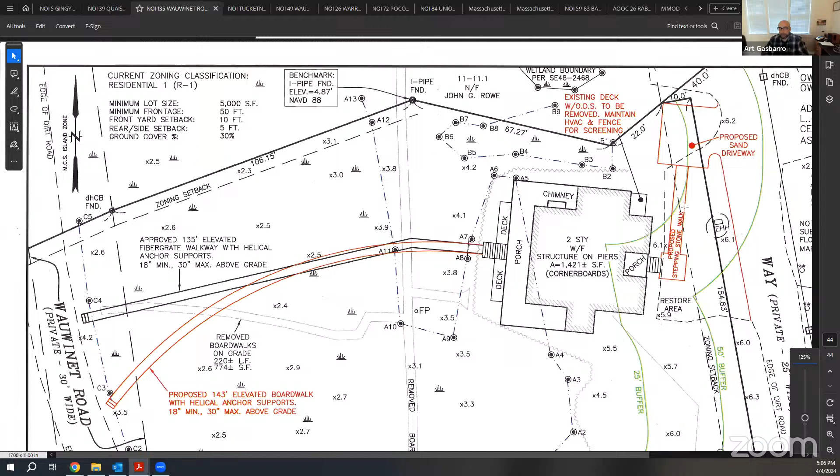And then there also was constructed as part of the last project, the last order, but outside of the approval, on the northeast corner of the house, a deck that had a platform with an outdoor shower and the HVAC units, which need to be elevated due to the location within the flood zone. And we heard the commission that there was concern with the outdoor shower, so that'll be removed. They would like to keep the fencing for screening purposes of the HVAC units.

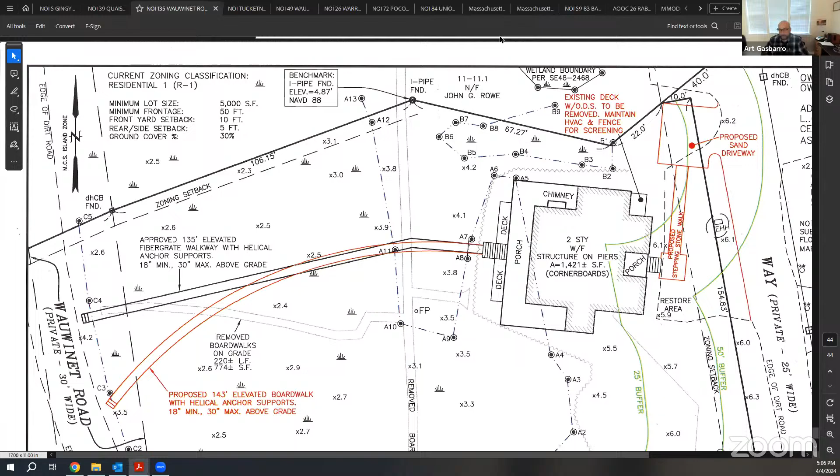And I believe that addresses the changes that we made. We also made a slight reconfiguration of the driveway to narrow up the curb cut to comply with zoning requirements. Again, it's kind of all a sand type area out there for parking, but I wanted to make sure that we showed compliance for zoning as well. And they need to have an on-site parking spot. So we are hoping to be able to finalize this project, clean everything up, and then close both orders of conditions. And with that, I'd be happy to take any questions or outstanding concerns.

Thank you, Art. And before I ask commissioners if they have any questions, I'd just like to register that Linda Williams joined the meeting at approximately 6 minutes past 5. And also, yes, apologies for the delay there in my screen share. I was just trying to get Linda renamed. No worries. All right. Seth.

Thank you, Mr. Chair. My question is related to the driveway area and the proposed stepping stone walk. So previously the driveway in its original location was outside the 50-foot buffer. Now we're looking at a driveway that's inside the 25-foot buffer, which is of some concern. I understand there might not be any alternative on this site, but I feel like the proposed stepping stone walk is not integral to the project and probably should be removed just in favor of it being a grass path. So thank you.

Well, thank you, Seth. Art, do you want to comment or wait until other commissioners? Sure, why don't I hear from everybody? Sure. Mark? Thank you. Yes. To refresh my memory, there was not going to be any side rails on the boardwalk, is that correct? That is correct. Thank you. Any other questions?

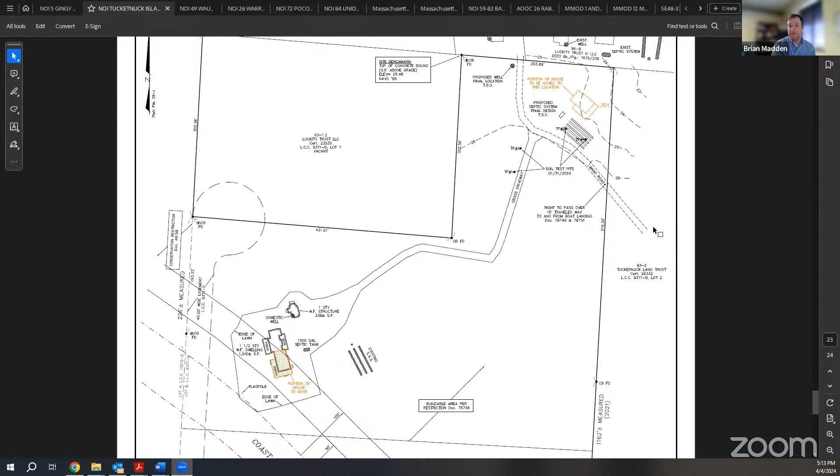And we did get the natural heritage letter, which we were waiting on last time around. So I'll turn over to questions. Thank you, Brian. Any questions?

And seeing none. Any input from members of the public?

So, Brian, would you like to close? Yes, please. And Will? We have everything we need to close.

Great. A motion to close, please. Thank you, Mark. Seconded by Mike. So by roll call vote: Tim Brain, aye. Seth Engelborg, aye. Mike Mazzarelli, aye. Joe Pandowski, aye. Linda Williams, aye. Ian Golding, aye. And since I see Mark Rits is now with us, unless anybody objects, Mark Rits votes aye.

Mark, I apologize. It's that dark shirt, Mark. You just fade into the background. Well, that and the list I wrote out that is incomplete. No slight intended. None taken.

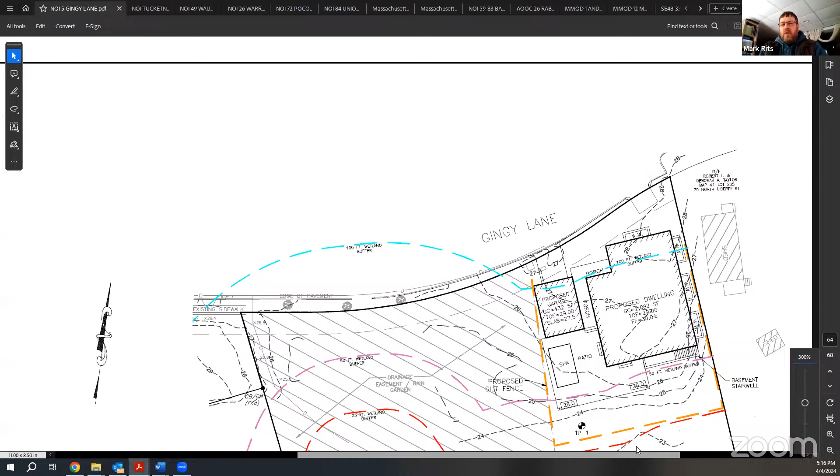We've been putting this one off for a little while. At the last meeting, there was some input from the public and there were questions from commissioners. One of the issues that came up was a question about the age of the wetland delineation. Instead of discussing the old delineation, we asked Brian Madden of LEC to go out to the site and do a new delineation for us back, I believe it was in February.

He went out to the site and reflagged the wetland. The wetland line you see on this plan is based on his most recent delineation. And what we see is there's an area where the wetland has in fact moved up, on the western side of the property. That is where the spillway is from the rain garden on the western part of the lot, the drainage easement there. So basically, the wetland has crept up towards the spillway where additional water is flowing out to the wetland. On the eastern side of the property, the wetland boundary is essentially the same as it was in the original submittal.

So we've shown newly calculated buffer zones. All of the development that we had proposed previously is still outside of the 50-foot buffer zone. In addition to doing the wetland delineation, we also conducted a test pit just south of the proposed spa.

And we found the groundwater elevation at that spot was approximately at elevation 20, or just under 20, just lower than 19 and change to 20. The spa that we're proposing is going to be 4 feet deep, so the bottom of that spa will be greater than 2 feet from seasonal high groundwater.

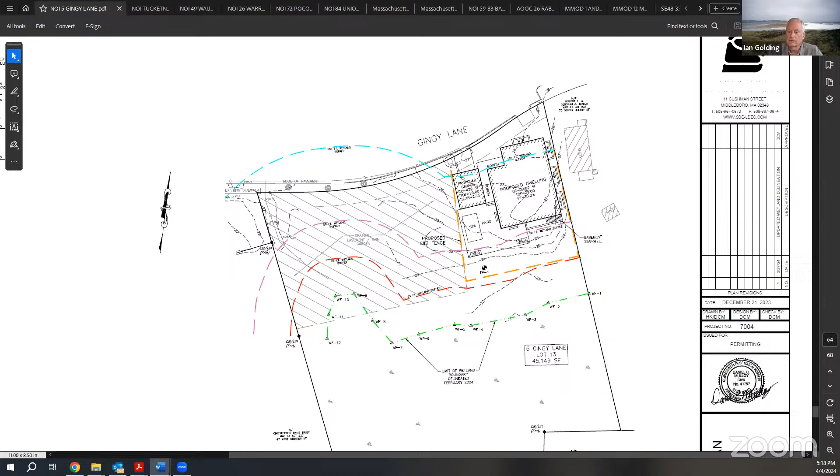Yes, Mike. Thank you, Mr. Chairman. When we were out for the site visit a couple of weeks ago, there was, as politely as I can put it, the site was in need of some cleanup within the 25-foot buffer, and I guess it's more of a question for Will. But did that get done before we proceed with this? It actually got done that day, through you, Mr. Chair. Sure. I'm not sure I could find it now, but I had video evidence of that small piece of chain link fence being removed. Completely take your word for it. Yes, not necessary. So, thank you, Mike.

Linda. I had the same questions as Mike, because there's containers, there's wood. I know it's probably on the lot next to this one, but it's involved with the construction of the house. There's a lot of junk over there, some very close to the wetland. So I just wanted to make sure that that was all gone. I have spoken to him about it, but I don't know if it's all gone. So I'll leave it up to Will to figure that out. But there was a lot more junk over there than just some stuff, including a container.

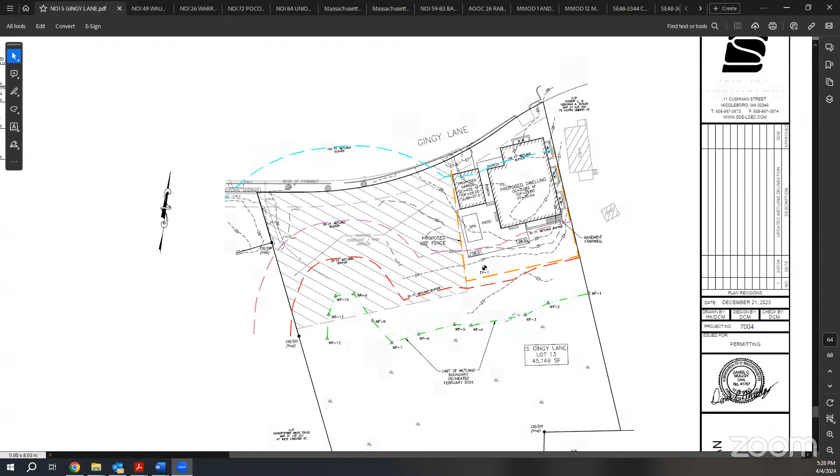Thank you. Would you like to see the revised wetland delineation on the screen again, Ms. Williams? That would be really helpful, because I didn't quite see what's considered a buffer zone versus what's not. Can you see that? Yes. So the drainage easement, which is what we call the rain garden on the street, does that now fall within the wetlands delineation? Because before it was much further back.

Mark, if I may, Mr. Chair. Absolutely. The cross-hatched area is basically the rain garden on the property. That was a constructed basin to help alleviate drainage issues for the entire Gingy Lane Street development when it was originally done. The wetland line shown in the green dashed line, wetland flag 7, right before the curve, used to continue to the west and bend down towards the south. That curved part has crept up into the rain garden, where there's a berm that creates a basin, and the spillway is just north of wetland flags 9 and 10. So the hydric features in the soils that classify an area as wetland have expanded slightly toward the rain garden, but the rain garden is a man-made drainage feature constructed on site, not a naturally occurring wetland itself.

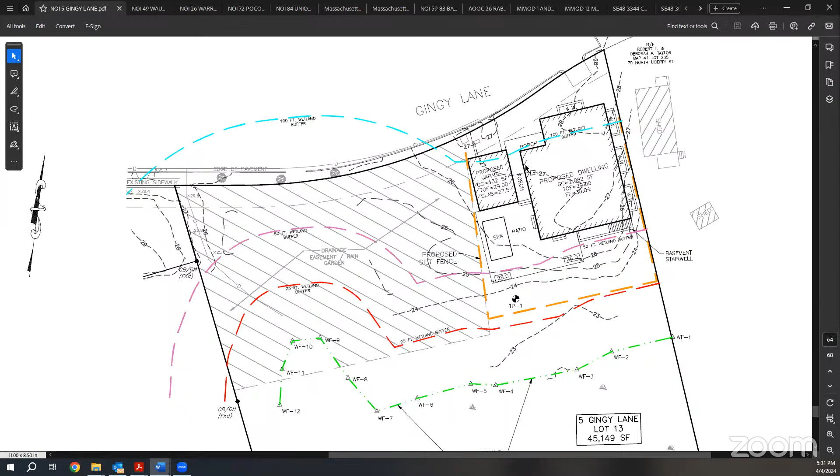Mr. Beavis? We've had problems with— Identify yourself, please. I'm sorry, Chris Beavis, 47 Westchester, abutting on the west side.

There have been considerable concerns about drainage and about grading, whether it was according to plan, during the construction of 9 and 11 Gingy. And I think that goes hand in hand with what people have been saying about continued flooding. I'm not sure the Concom is the place to address it, and I'm not sure the engineering was either done according to plan or well thought out for Gingy Lane in particular, so I'm not sure what we can do about that at this point. But I note with some alarm that in the revised wetland delineation, the wetland is moving quite close to our property line. Yes.

Seth, do you wish to reply? Yes, Mr. Chair. So I would say that we are only able to discuss the proposed activities on the project locus and what's being presented by the applicant. But that doesn't preclude anyone else in the Gingy Lane area, or the Gingy Lane Homeowners Association if it exists, from coming forward with a new proposal to improve that rain garden or drainage easement. I don't know the homeowner structure or management of that, but if the neighbors think there's an issue that needs revision, they could bring a notice of intent to deal with that.

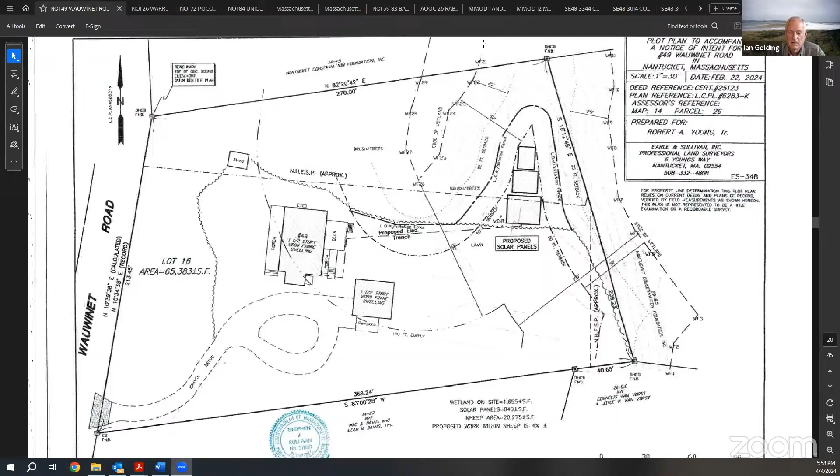Thank you, David. So, commissioners, any objections to closing the hearing? Anything from members of the public, Will? Negative. So, a motion to close. A motion to close, please. Thank you, Mark. Seconded by Mike.

Thank you, Mike. By roll call vote, Mark Beal, aye. Tim Brain, aye. Seth Engelborg, aye. Mike Mazzarelli, aye. Joe Plandowski, aye. Linda Williams, aye. Ian Golding, aye. Thank you, David. Thank you all and have a good evening.

You too. So moving on to Burnham and Buttrick, 26 Warren's Landing Road. I have to recuse from this, Mr. Chairman. This is a long-standing client. Certainly, thank you, Linda. All right. Brian Madden from LEC representing the applicants. This is also a proposed solar array project.

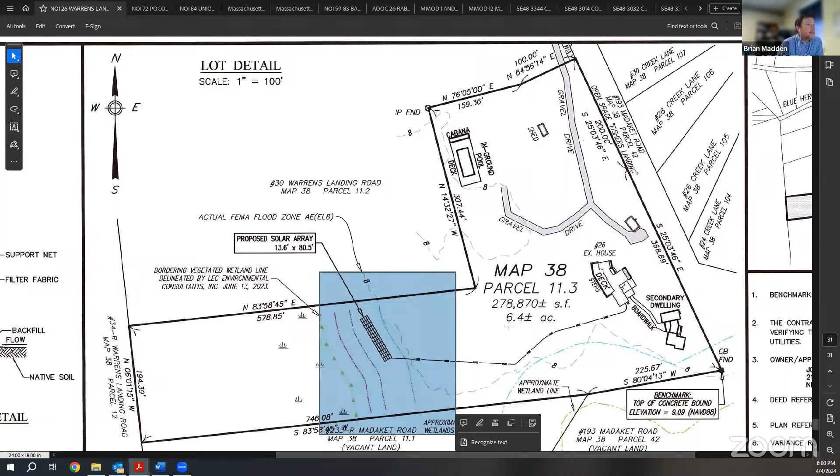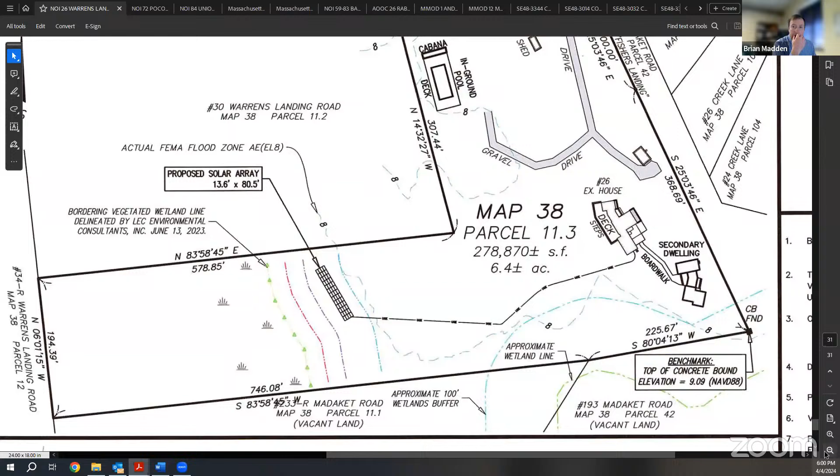All right. So the proposed work involves an 80.5 foot long by 13.6 foot solar array within the westerly portion of this backwards L-shaped parcel. There's bordering vegetated wetlands to the west. I realize on the plan in front of you maybe some of the line work isn't coming up as clear, but just to review some of that detail. Oh yeah, there we go.

Thanks, Will. So we have BVW to the west, and a portion of the project site for the solar array is located within land subject to coastal storm flowage up to elevation 8. The amount of vegetation alteration has been minimized around the solar array, basically 5 feet to the north, east, and west, and 10 feet to the south. And then you see the underground electric line continuing off to the east.

The area is currently occupied by bayberry, and no trees are proposed to be altered as part of the project. As necessary, the interior will be loamed and seeded, but the intent is to keep the topography as is and just mow down the bayberry. No formal regrading is proposed. The panels themselves are going to be supported by ground screws that will just be driven into the natural grades.

The existing grades average around elevation 7 in the proposed footprint. And again, the flood zone elevation is 8. The lower portion of the elevated panel will be 18 to 30 inches off grade, so above that flood zone elevation. The max height of the panels is not going to exceed 5 feet in height, so pretty low lying. It will be completely shielded by the surrounding vegetation and not visible. This is a pretty isolated location on its own.

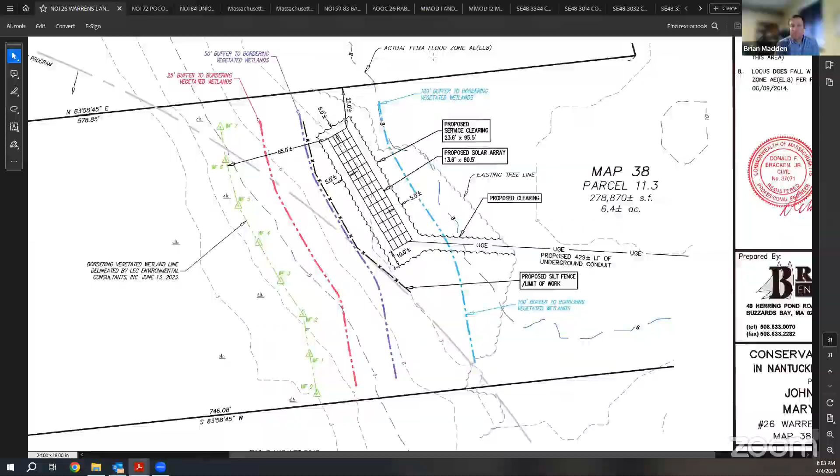Thank you, Brian. Commissioners, yes, Mike. Thank you, Mr. Chairman. Brian, when you said you were going to mow down the bayberry, wouldn't you be just ripping it out in the clearing area so it wouldn't grow back up around the panels and then seed the ground? Did I hear that incorrectly?

Yeah, it's just going to be mowed down, and then the interior is going to be consistently mowed. There may be some level of ground disturbance, as any temporarily disturbed areas will be seeded to make sure the area is vegetated and stabilized. But there are no plans to grub or remove or do any grading here. Okay, I would have thought they would want to grub and remove, but if they want to just mow it down, that's fine with me.

Thank you. No problem. For future generations to make candles. Right.

So, any further questions from commissioners or members of the public? And seeing none, would you like to close, Brian? Yes, please. And Will, do you have everything? Yes, we do. Great. Motion to close, please. Thank you, Mike. Seconded by Tim.

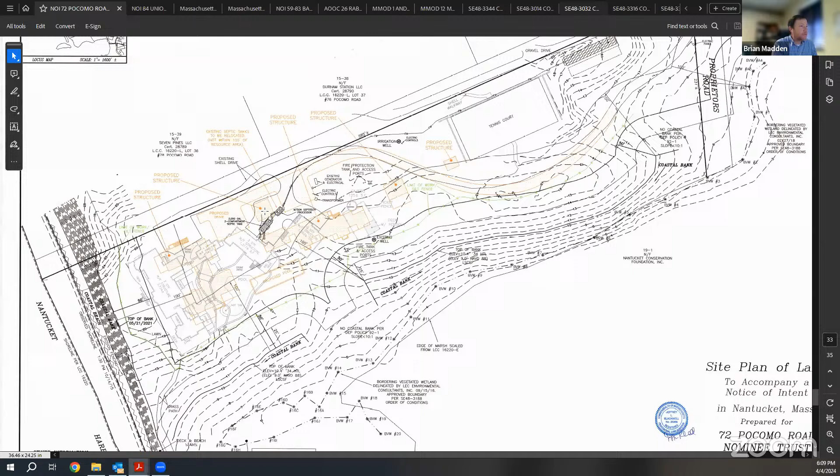Thank you, Brian. Questions from commissioners? Questions from members of the public? Seeing none, would you like to close, Brian? Yes, please. Will, thumbs up? Indeed. Okay, motion to close. Thank you, Mike. Seconded by Joe.

Thank you, Joe. By roll call vote, Mark Beal, aye. Tim Brain, aye. Seth Engelborg, aye. Mike Mazzarelli, aye. Joe Plandowski, aye. Linda Williams, aye. Ian Golding, aye. Thank you, Brian. Thank you. So that brings us on to Nantucket Islands Land Bank, 84 Union Street. Rachel?

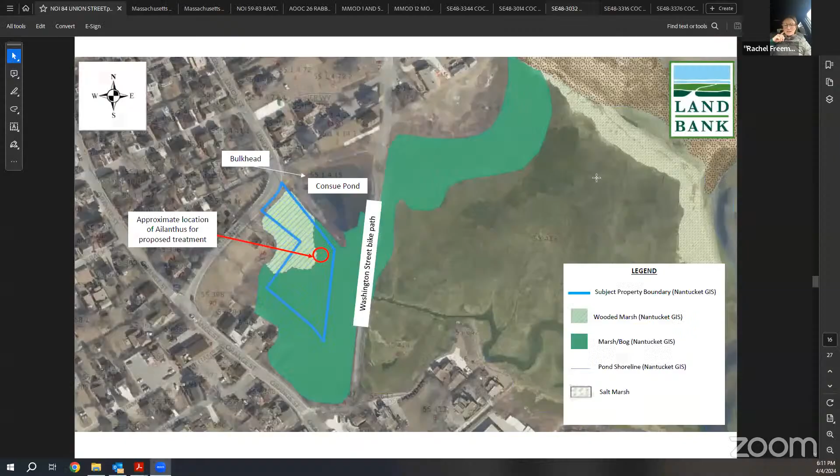Good evening. Thank you, Mr. Chair. My name is Rachel Freeman, and I'm here tonight representing the Nantucket Islands Land Bank on a notice of intent application to manage Tree of Heaven, or Ailanthus altissima. This is an application for 84 Union Street, which is within the Consue Springs Marsh. There's a very small patch, which is definitively the only trees on the site in the middle of the marsh, and our goal is to attempt to eliminate it, or at least reduce it so it doesn't spread any further.

Just a little bit of history in the Consue Springs Marsh. This property is basically part of a network of wetland resources in the area. The Consue Springs Marsh was generally connected to the creek's salt marsh system, but it was bisected by a railroad berm in the mid-1800s. So inland, it tends to be more freshwater, and on the ocean side of the berm, it tends to be more heavily dominated by salt.

So the purpose of this project is to minimize and eliminate the Tree of Heaven. As I said, this is a species that was brought to the United States from central China as an ornamental plant. One of our biggest concerns with this species is that it actually is one of the preferred host plants of the spotted lanternfly, which is an extremely destructive insect.

The way that this management occurs is you basically do what's called a hack and squirt method. You use a small axe to hack and penetrate the bark, and then you put herbicide, which is actually an aquatic triclopyr, into the area where you've penetrated the bark. Once the plants die, or hopefully die, you can remove the dead trees themselves about 6 to 8 weeks after application. This is the first time we've treated Tree of Heaven on our property, and we are excited to see how this works. If you have any questions, I'm happy to answer them.

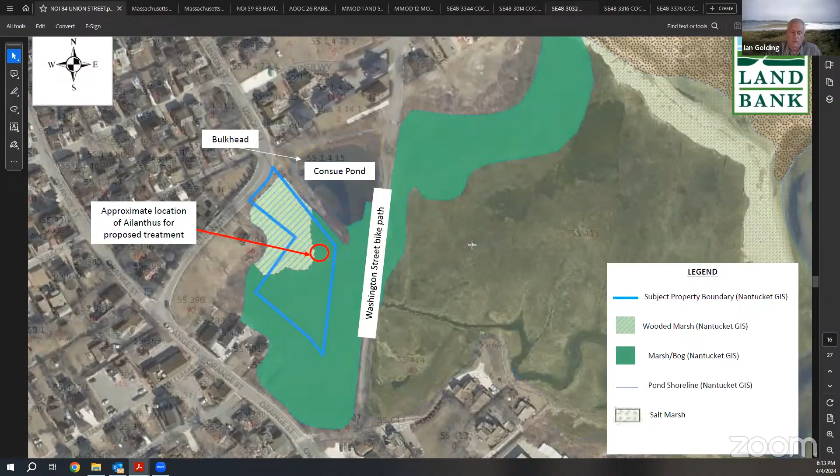Thank you, Rachel. Any questions? Mike? Thank you, Mr. Chairman. Rachel, I'm just curious how big the infestation is in the area. Is it like 1,000 square feet or less, more? Much less. I want to say there's probably 10 tall trees. It's very visible. If I had to estimate square footage, I'm guessing it would not exceed 500 square feet, but it's probably less.

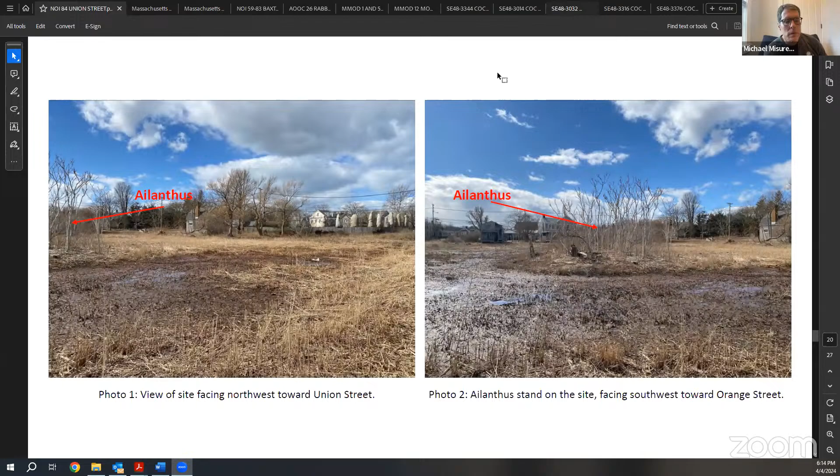Yeah, I mean, I'm all for the removal. It's just more of a question. I think I've seen it when I drove by it. Right, it's basically the only thing that is tall in that area, frankly, other than Phragmites. So great. Thank you. No problem.

Yes, Tim? Sorry. Yeah, just a quick comment. Spotted lanternflies, I was in New York this summer when they were invading, and they're really gross. So I think this is a good project. They're actually pretty. They look pretty, but they're horrifying. I mean, I hate them, but they're pretty. Well, perhaps we prefer not to see them on Nantucket in mass numbers. Not at all.

Mark? Yeah, thanks. Just a question for Rachel. Is this a sumac relative? You know, that's a really good question. It appears to be, but I don't actually know. I would have to look into that. But you're right, it does generally look like a sumac. I would agree.

So you don't want to retain them to try and trap every lanternfly on the island, I take it. Well, lucky for us, there's other places where this tree exists. No, we don't. One of its common names is stinking sumac. There you go. It is a sumac. Obviously not held in high regard with a name like that.

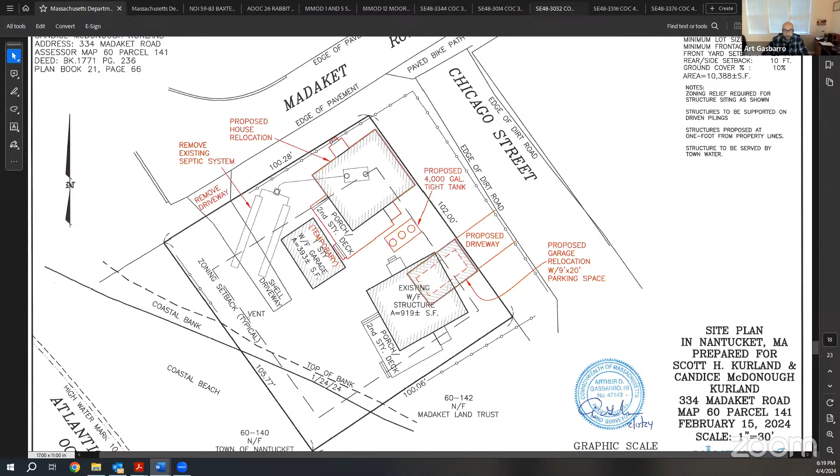So I believe this is a beneficial project in terms of trying to move the houses before they fall over the coastal bank and buy some more time for the owners to enjoy their property. And I'd be happy to take questions or concerns if you might have any with the application. Thank you, Art. Questions from commissioners?

Yes, Tim. I'm just curious, how far from the bank will the new location be of the house? I would need just a minute to get you that information, but if you want to go, in case anyone else has questions, I can look that up real quick. Actually, that was going to be my question too, because I noticed that on the plan, there was no indication of how far it was. As far as possible. Sorry, I don't mean to be. I'll get to the number though. No, that is clear. Mike?

Art, is where the house sits now, does that reflect where you're going to be if you get the zoning board's approval to go farther into the setbacks, or are you just sort of at the limit of what you can do right now? No, the same application was filed with both boards. So this approval is dependent upon, well, essentially we have to get all required permits. So if the ZBA was not inclined to issue that, then I would have to come back to the Conservation Commission. Got it. Thank you.

Any other? If I could add, though, I will say it's one of the few cases where in general practice, the zoning board of appeals has issued variances for yard setbacks. Thank you, Art. Any further questions? Yes, sir. And I have your answer. The corner of the house in the relocated position to the coastal bank would be about 56 feet. So I'm not measuring it to the deck that you see on the plan, but it's the southwest corner of the house to the top of the coastal bank is about 56 feet. Thank you. Any further questions? Mr. Chairman, and the garage would be about 42.

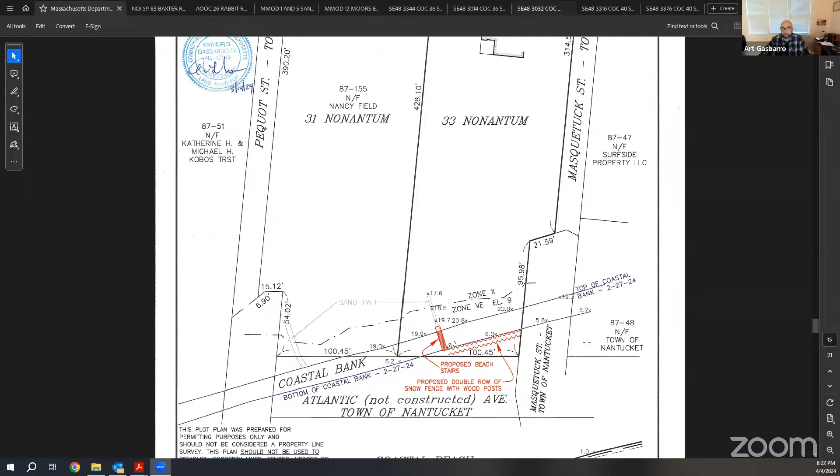Thank you. And that brings us on to Glenby LLC, 33 Nonantum Avenue. And you're up again, Art. Thank you, Mr. Chairman. This is an application on the South Shore area that also experienced a fair bit of erosion through the past few months. And there's a bit steeper of a drop off there, and the owner would like to install a set of beach stairs over the coastal bank to get down to the beach, which is shown in red on the plan in front of you. We are proposing to use a set of aluminum stairs so that they could be removed seasonally and/or hopefully avoid having timber lost to any erosion.

And then also shown is they would like to do a double row of just your traditional snow fencing with wood, not metal posts, to hopefully try to promote the development of a natural dune at the base of that coastal bank. We're not proposing to bring in any sand. All of this work would be done by hand, and that's the extent of the application. Thank you, Art.

Questions from commissioners? Yes, Seth. Thank you, Mr. Chair. I have concerns about the snow fencing, particularly in the layout that it is described on the plan with the double row, because I'll point you to the Nantucket Wetlands regulations definition of structure, coastal engineering. And it reads as any structure intended or constructed so as to prevent or alleviate storm damage or modify tidal action, wave action, littoral flow, or erosion. And then there's examples. I'll skip some of those examples, but the last example is multiple rows of fencing.

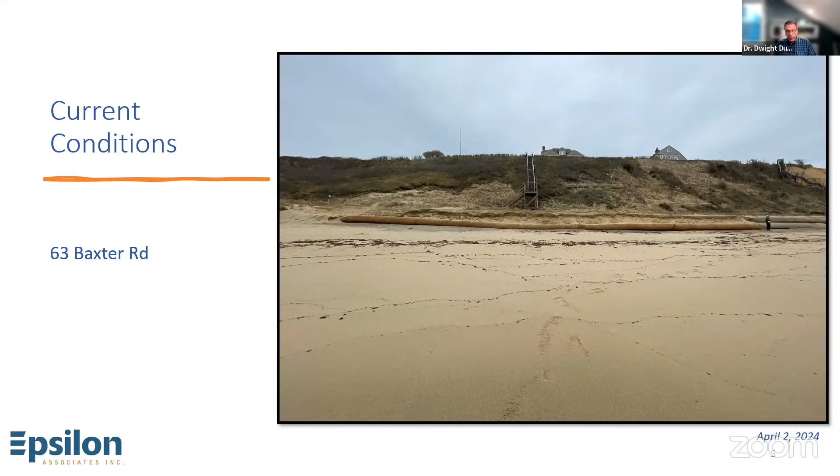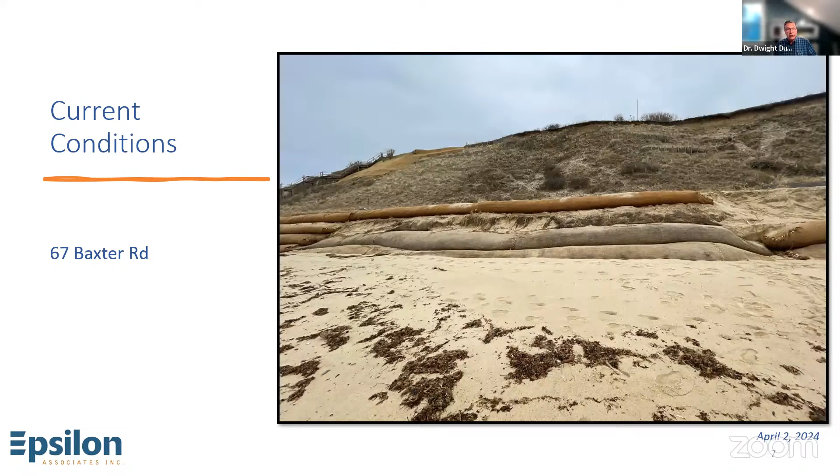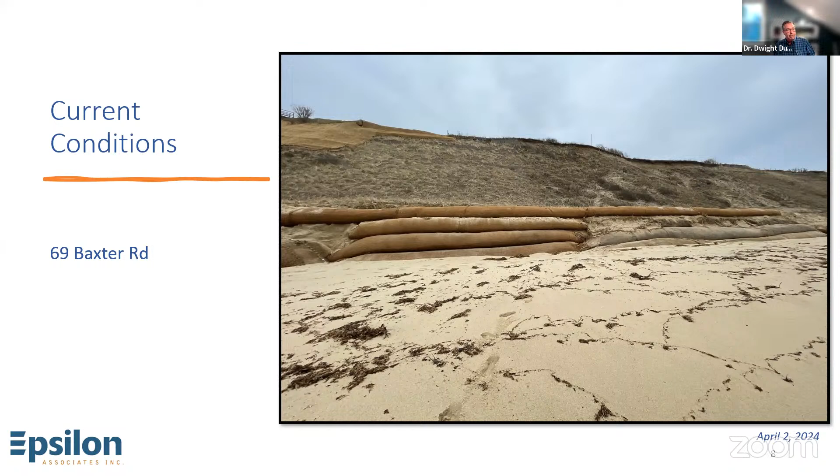So lot by lot, as of 2 days ago, after the work was completed, we can see the Coir terraces that were replaced at 63, 65. There were terraces that were still in decent shape that remained, and then areas to the north, to the right, were replaced. An additional row here at 67. Some repair and augmentation or addition above the pre-existing Coir at 69. 71, not too much, just a little bit there to augment what was remaining.

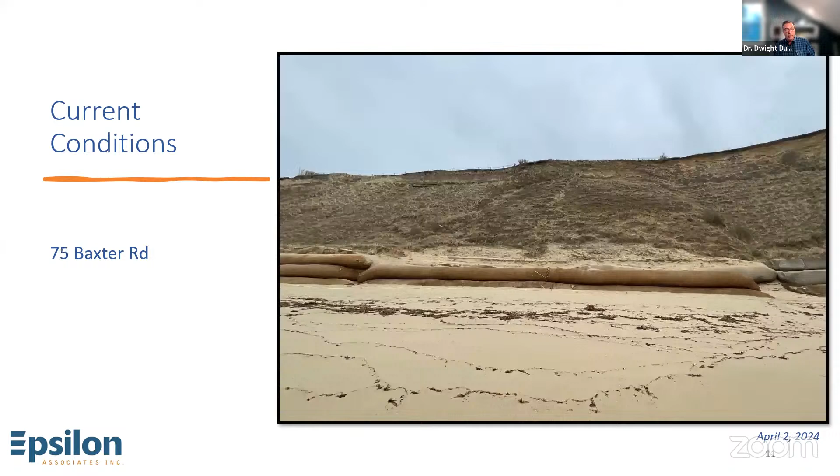73, I have 75, 77, the coir that was there, you can see it's weathered, and then another row up behind it.

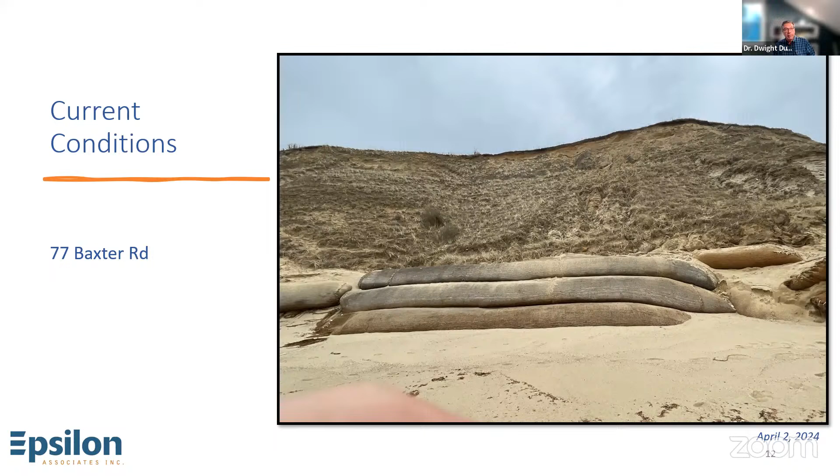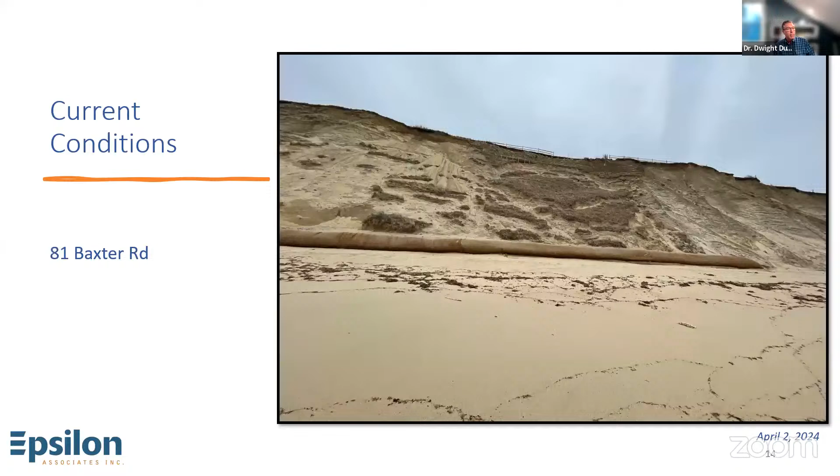79 actually experienced about 18 feet of erosion of the toe on that slope. There were a few rows of coir terrace installed at 79, 81, and then 83 had no additional work done.

In the other part of the notice of intent, when I talked with Mr. Carlson about the emergency certification and pursuing these repairs, replacements, and maintenance, I think people on the commission understand that the prior installations were done, like I say, circa 2004, 2007, pursuant to those older orders of conditions.

These maintenance activities have been in a gray area. So part of it was to get a new order of conditions to allow the homeowners to continue to maintain the coir terraces at their properties, again, to maintain the status quo.

So the intent here with the requested order of conditions would be to allow owners to do the additional repairs and replacements up to four tiers that was not able to get done during the 30 days, to continually inspect and repair, maintain, or replace terraces as needed.

The construction equipment would access via Hoicks Hollow or Codfish Park. The equipment and materials would stay above the mean high water line when doing the work, and then during the annual maintenance add 2.3 cubic yards of sand per linear foot, which is consistent with what's been out there for years.

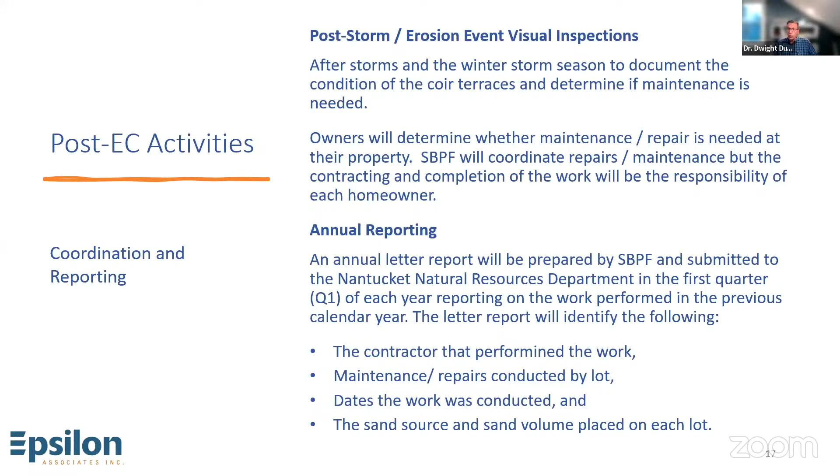I think consistent with practice, the contractor will notify the Conservation Commission with the work start notification. That notification will likewise identify the contractor, the proposed dates, and provide the grain size analysis to show that any sand being used out there is consistent with the beach.

And just to summarize the main points here, in seeking to maintain the status quo along this reach of Sconset Bluff, the work proposed is to help blunt erosion of the bluff. We know that the coir terraces assist in minimizing erosion. They don't prevent it, but they help stabilize things and provide some level of protection that will not increase erosion or decrease the volume of the beach.

The coir terraces will be covered by sand to protect them. In terms of the DEP, they're not considered a coastal engineering structure. For Commissioner Engelbourg, I just want to identify that statement is relative to the DEP. Again, we'll check sand sources to make sure it's compatible by grain size.

And again, this is provided as a joint MESA WPA notice of intent, and to date we have not received comments from the Natural Heritage and Endangered Species Program. That was really what I wanted to talk about tonight, what was done to date under the emergency order and the plan to go forward with an order, provided an order of condition is issued, so that what's been going on out there for the past 20 years or so can continue.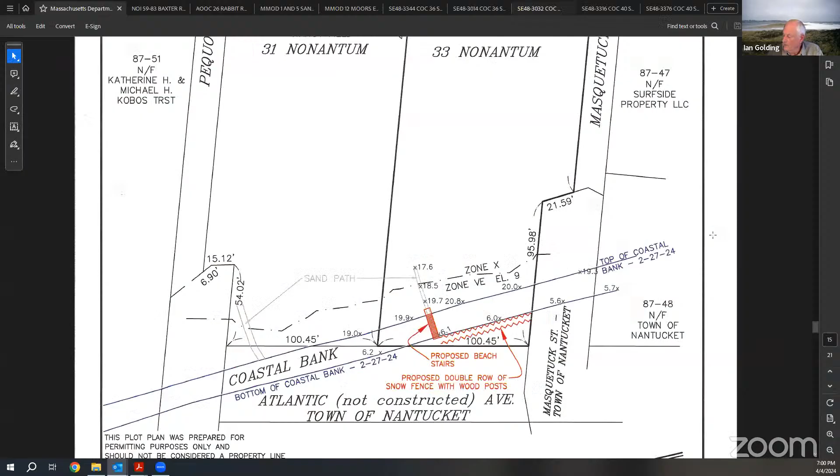So I put it to you that the figures you include in your supplementary letter are really a gross underestimate of what is needed and what is not going into the littoral system during storm events. So, yes, Seth. Unless, Will, do you have your hand up for something before I recognize Seth and Mike?

I have two public comments just to read into the record, but if you want to keep rolling with commissioners, that's totally up to you. Yes, absolutely, before members of the public, I want all commissioners to have their say. Seth?

Thank you, Mr. Chair. So if I'm understanding the discussion correctly, the individual installations at homeowners' properties are going to be based on whatever they want to do, not necessarily science-based. Is that correct? And if so, wouldn't that cause issues? Let's say theoretically homeowners decide on one property to do more or less or none at all. Isn't that going to exacerbate erosion issues on neighboring properties? Isn't that what we're trying to prevent? Thank you.

Chair, can I respond to that? Absolutely, Meredith. So that is obviously the reason why we have the other application before you. I think you point out an amazing and very accurate point. The resolution we're trying to achieve is to have the singular project we've applied for separately. All we're trying to do here tonight is maintain a status quo of a permit that's been in existence for 24 years, a long time period of protection these homeowners have had.

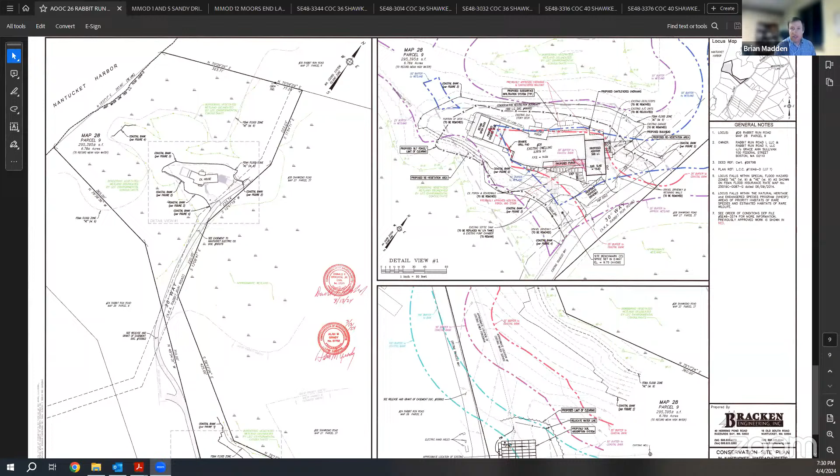That brings us on to amended orders of conditions, Rabbit Run Road, LLC, 26 Rabbit Run Road. Brian Madden. Excuse me. Thank you very much. Brian Madden from LEC Environmental Consultants representing the applicants. This is an order of conditions that was issued in October 2022 for some renovations and expansions to the existing single-family home on the property.

Just to quickly run through the updates, the 685 square foot addition on the east side of the dwelling that was overlapping with the lawn and driveway has been reduced in size slightly to 568. A portion of the interior is being modified for a garage space. The approved cantilevered balcony on the north side of the addition has been eliminated, and the adjacent roof overhang has been adjusted, so it's been pulled in.

In lieu of the addition expansion that was previously approved that wrapped around the front part of the building, the applicant is proposing to expand the front porch by 1 foot, just so it aligns and evens out with the front facade of the dwelling. There's also a bulkhead being proposed, grill pad, retention of a second-story cantilevered deck, and some other minor landscaping updates.

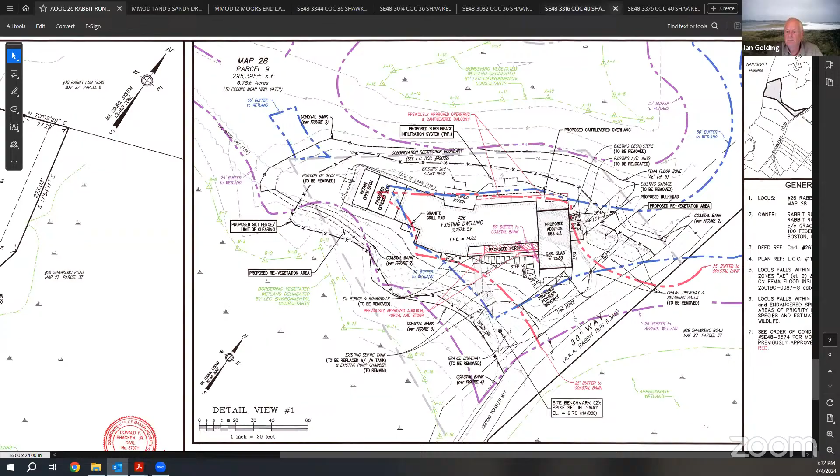We have proposed to slightly expand the revegetation areas here that now total 2,186 square feet. So the project updates align with the previously issued orders and the granted waivers for long-term net benefit. And I'll turn over to questions. Thank you, Brian. Any questions from commissioners? Members of the public?

A motion to approve this amended order? Thank you, Mike. Thank you, Tim. By roll call vote, Mark Beal, aye. Tim Brain, aye. Seth Engelbourg, aye. Mike Mazzarelli, aye. Joe Pandowski, aye. Linda Williams, aye. Ian Golding, aye.

So that brings us on to no request for determination of applicability. So for minor modifications, the Eloise Nominee Trust, 1 and 5 Sandy Drive. Brian? Thank you. Brian Madden from LEC representing the applicant. Proposed updates are minor reconfiguration, footprint changes to the garage and associated driveway parking area, all outside the 50-foot buffer zone to the isolated wetland to the south. And that's it.

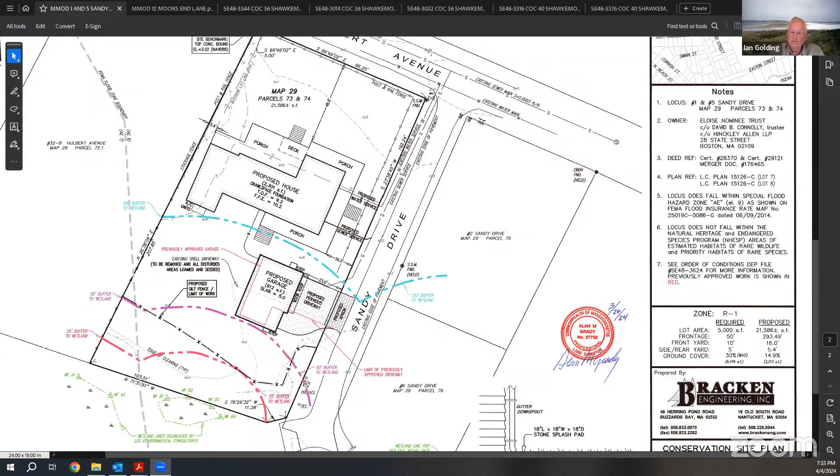Okay. Any observations, comments, questions? Seeing none, a motion to approve this minor modification. Thank you, Joe. Thank you, Mark. By roll call vote, Mark Beal, aye. Tim Brain, aye. Seth Engelbourg, aye. Mike Mazzarelli, aye. Joe Pandowski, aye. Linda Williams, aye. Ian Golding, aye.

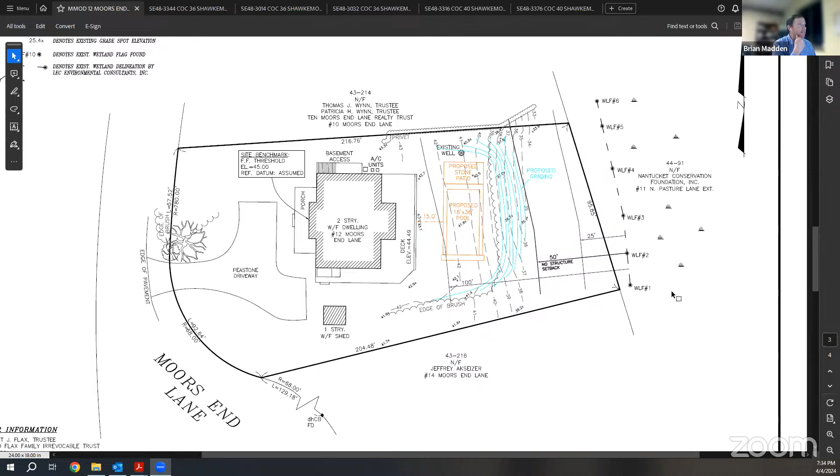The other minor modification is 2020 Flax Family Irrevocable Trust, 12 Moors End Lane. Brian Madden from LEC. Pretty simple update here too. This was a project that was just recently approved with the commission. The pool location was pushed 5 feet closer to the house to confirm that the regrading is outside the 50-foot buffer zone. And that's the extent of the updates. Thank you.

And motion to approve. Thank you, Joe. Thank you, Mike. By roll call vote, Mark Beal, aye. Tim Brain, aye. Seth Engelbourg, aye. Mike Mazzarelli, aye. Joe Pandowski, aye. Linda Williams, aye. Ian Golding, aye. So that brings us on to certificates of compliance.

And there are three for Shawkemo LLC, 36 Shawkemo Road. Do you want to handle those all at once, Brian? Yeah, if you don't mind, I'll go through them one by one, but we basically just have an as-built per property, and apologies to dump these all together, but I'm just cleaning house, so I'll go through them one by one. And to start with, what's first on the agenda? 36. So there's three orders on this property, and I'll start back at the beginning.

Okay, so the first order is numbered 48-3014. This was for an addition and construction of a patio roof, pergola, and associated grading landscaping. This was on the east side of the main dwelling. It's not isolated on this as-built, but it's where those measurements are 42 and 63 feet, generally in that vicinity. Everything is substantially in compliance with what was approved. I did try in these certs to call out all the ongoing conditions. And so on this one, it's number 19 relative to exterior lighting.

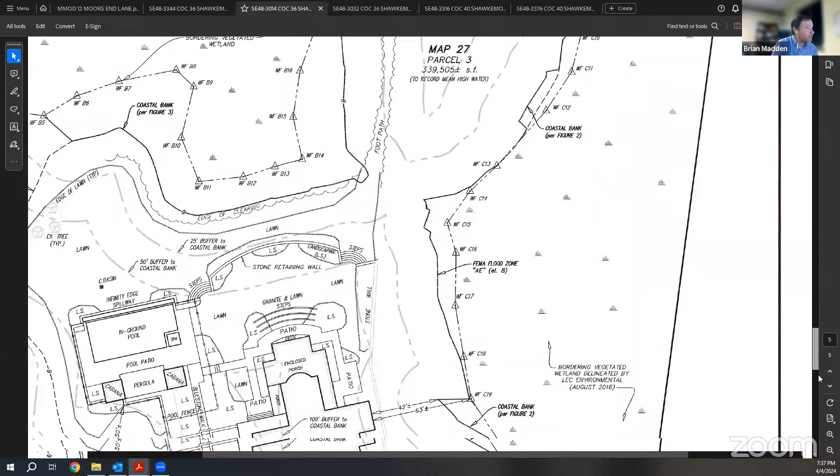The next order is 48-3032. This was an order issued November 29th, 2017. This is for a larger redevelopment of the site, including relocation of a pool, relocation of some structures, hardscaping, retaining walls, tennis court, grading, landscaping within the buffer zones to Coastal Bank and BVW. There was an amended order for a proposed cart path and greenhouse. The greenhouse ultimately got constructed outside the 100-foot buffer zone. It was initially within the outer 100-foot, but was relocated.

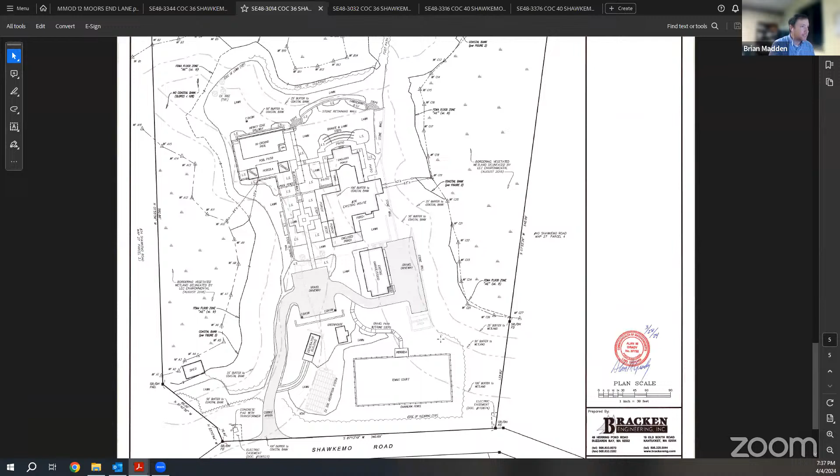This one had some proposed revegetation areas that have been monitored for greater than 3 years. They were installed in 2019, and all the vegetation, as evidenced in the photographs, is coming in quite nicely and robust. There's ongoing conditions for this one for pool maintenance, so 20, 21, and 22. And then 23 is relative to exterior lighting.

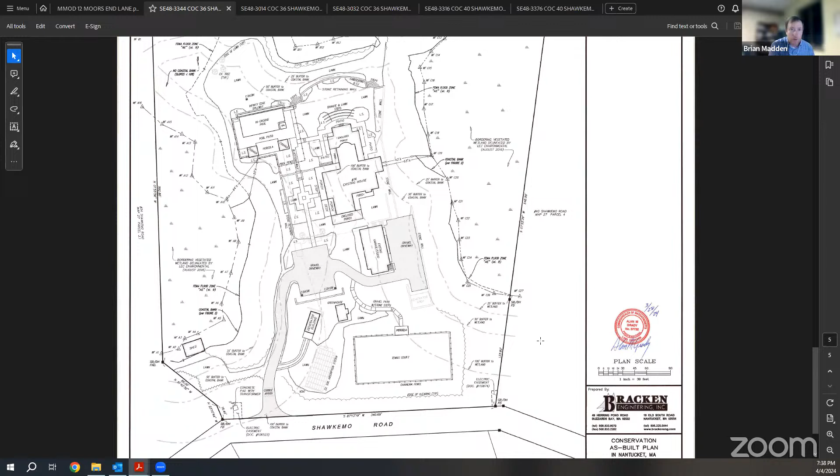And the last order on this property is 48-3344 for an order of conditions issued on October 16th, 2020. This is for renovation of what we called the boathouse. It was an existing structure within the northerly portion of the site, for some additions onto that structure and associated work. And so no ongoing conditions were part of this project, relatively straightforward. And so as demonstrated in the photographs I submitted and on the as-built, everything has been completed in substantial compliance. And I'd be happy to answer any questions.

Thank you, Brian. Any questions? Will, have you been out there? Yes, absolutely. And I think, I don't know what happened. We may have taken those out of order, but I have the condition numbers and everything. The first one was supposed to be for the boathouse on the agenda, so it was just flipped. But so the first one I recommended closing, no continuing conditions.

The second one, which was 3014, had the exterior lighting condition number 19. All exterior lighting is to be directed away from resource areas. And then the third, 36 Shawkemo, which was 3032, has 4 continuing conditions. 20, pool should not be chemically treated between November 1st and May 1st.

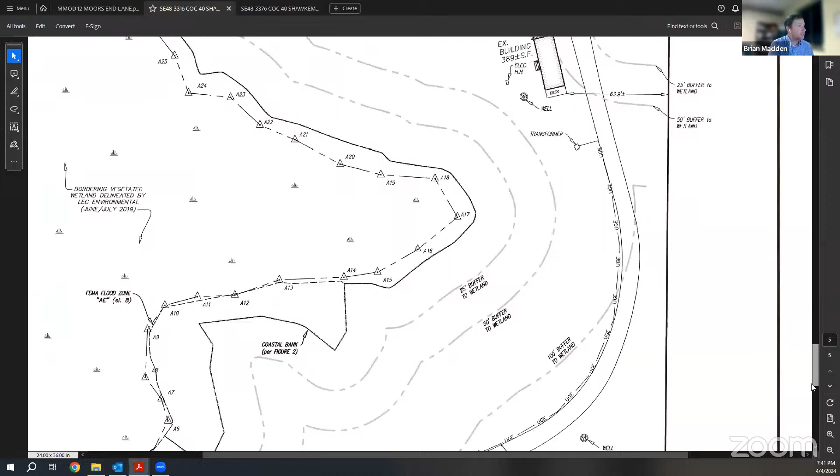And that brings us on to certificates of compliance for Cedarview Point LLC, 40 Shawkemo Road. SE 483316 and SE 483376. Brian? Thank you. So I'll do these in order. So 483316 was issued August 7th, 2020. That was for a septic upgrade outside the 100-foot buffer zone and some driveway improvements that were within the outer 100-foot buffer zone. That's within the southerly portion of the site. All completed in substantial compliance, no ongoing conditions there.

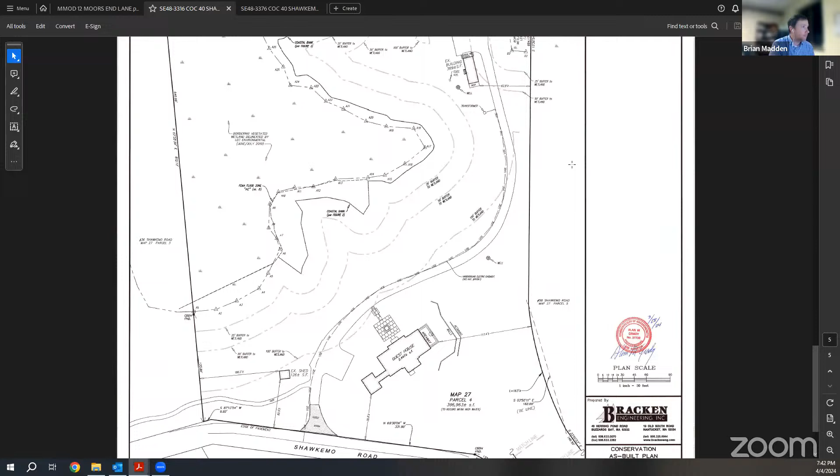The next one is 483376. This was issued in February 2021. This was on the main dwelling area within the northern portion of the site. It included the removal of existing deck, installation of fencing around the pool, some hardscaping, vegetation, removal of some retaining walls and associated grading and landscaping. All of that work was completed in substantial compliance and also no ongoing conditions as part of this project. I'll turn over to questions.

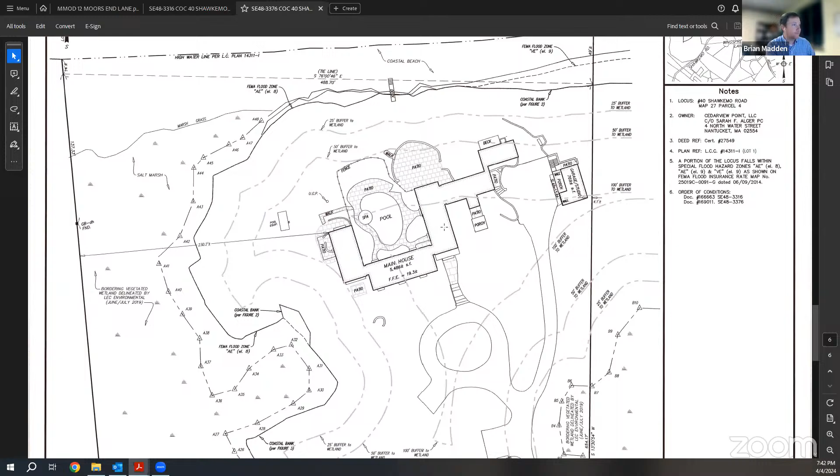Will? Can confirm, recommend issuing. Both have no ongoing conditions associated.

Cool. After inspecting the wrong property first. Don't worry, back in the day, I inspected the wrong property for a rental and signed a rental agreement. Anyway, that's neither here nor there.

A motion to approve. Thank you, Tim. Thank you, Mike. By roll call vote, Mark Beal. Aye. Tim Brain. Aye. Seth Engelbourg. Aye. Mike Mazzarelli. Mike? Still on mute. I think he's trying. Okay, thumbs up from Mike. Joe Pandowski. Aye. Linda Williams. Aye. Ian Golding, aye. So this brings us on to orders of conditions.

And Will, you want to bring them up on the screen? Yep. Okay. So we have incoming. The first one is Lampoon Nominee Trust, 6 Westcote Place. And I see that Attorney Woods is on my screen. Glenn, do you have a comment in light of the letter that you sent us? The OOC as drafted is fine with us, Mr. Chair. Thank you very much. Wonderful.

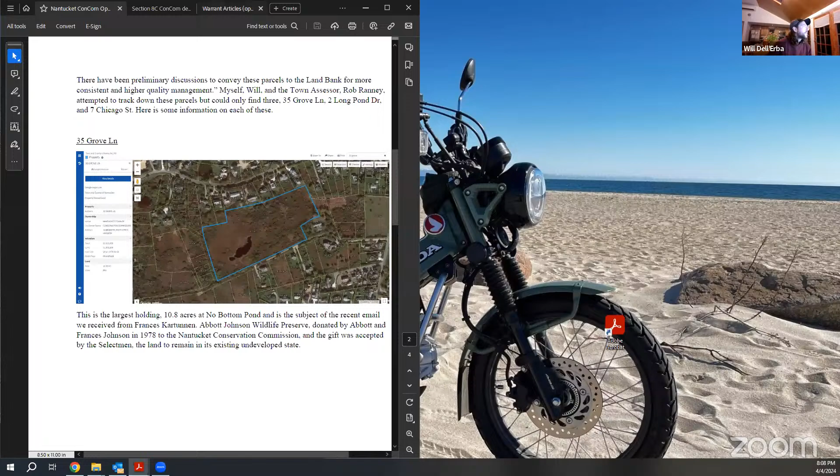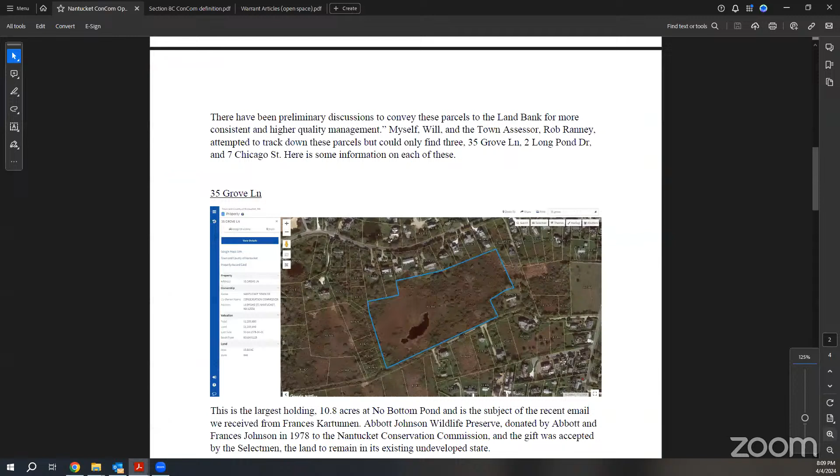Mr. Chairman, through you, a question: Seth, does the Conservation Commission actually hold title to these or just stewardship under the town of Nantucket? We are listed on all of these as a co-owner. I have not actually gone to the registry and done a title search, so I'm unaware, but I know for this one at least, 35 Grove Lane, which is the first one, it was actually given specifically to the Nantucket Conservation Commission. We have records from members of the public and testimony to track that down. The other, I'm not sure about.

The town of Nantucket is listed as a co-owner on all these parcels. Whether the ownership has changed or morphed over time is unclear to me, and we can get some clarity on that. But it's my assumption that both the town of Nantucket and the Nantucket Conservation Commission are on the title of these parcels. Which is going to be a point that I bring up later, because the warrant articles that we have to discuss indicate that the Conservation Commission is just the manager of these properties, and I'm not sure if that's actually a true statement.

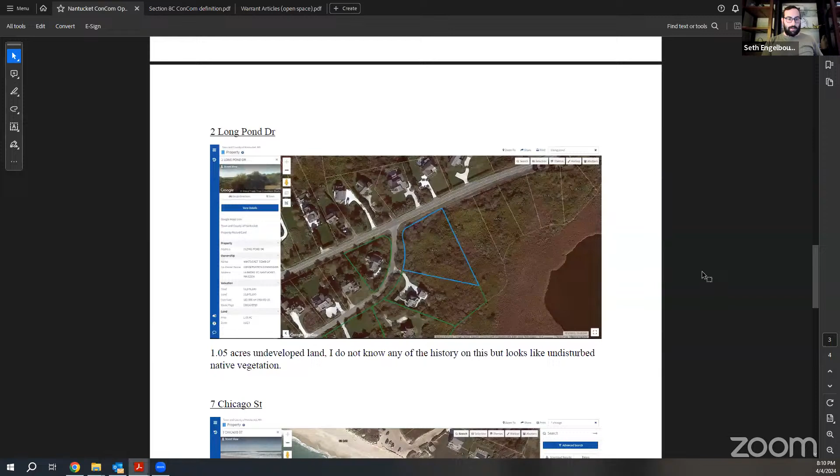But anyways, before we get there, 35 Grove Lane, it's 10.8 acres. No Bottom Pond, if you all have heard of that. And this is one of the areas that is listed on the 2024 Nantucket Annual Town Meeting warrant to be potentially transferred to a different entity. And then if you go down, Will, there's 2 Long Pond Drive. It's 1.05 acres of undeveloped land. That's not subject of any warrant article at this town meeting, but it could be a discussion for the future about whether we want to retain this or transfer it.

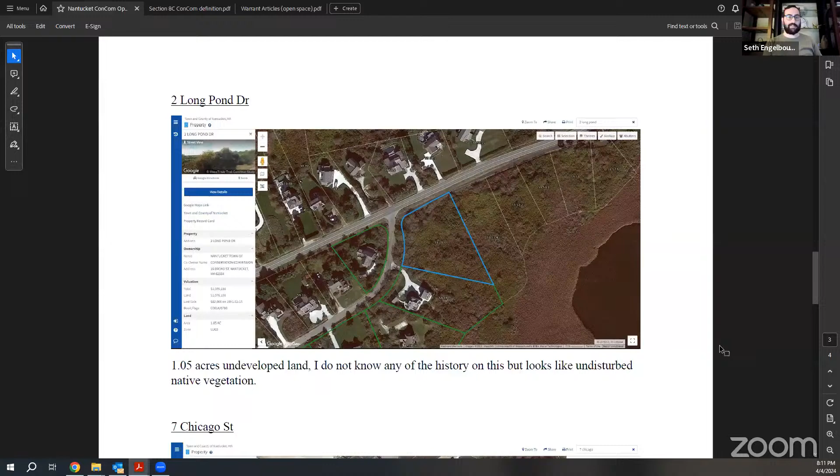And then 7 Chicago Street, if you go down, is theoretically 1.30 acres, but as you can see, it's mostly in the water at this point. And actually, it's probably even more in the water at this point. That's also not subject to any potential transfer at this annual town meeting, but that does exist. Then we had a lot of trouble finding the other 3 parcels. Will, you can take down the screen for a second.

And the reason for that, I finally realized, is because the other 3 parcels are in road layouts. And one of them is a portion of Ames Avenue. And that portion of Ames Avenue is subject to a potential transfer at this annual town meeting. So, Will, can you put up the other discussion with articles 85, 90, and 98? Yes, Joe. I have Article 85 here. It says that the land is owned by the town of Nantucket, held under the care, custody, and control of the Nantucket Conservation Commission. Now, I don't know if that's true or not. That's what's in the warrant. That may not be what's on the deed.